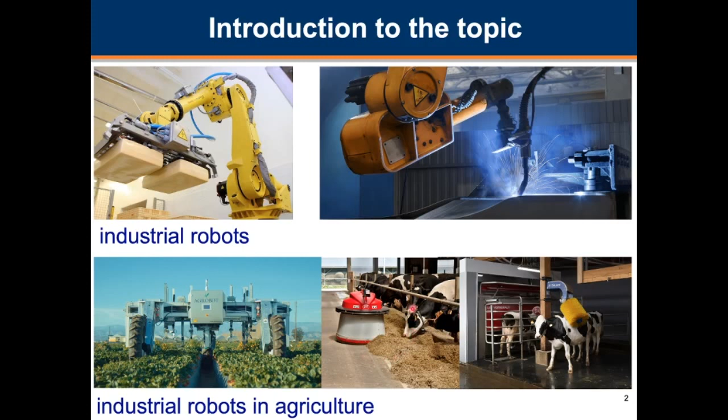The most technologically advanced solutions are milking robots, as they perform a number of operations such as locating the teats, pre-cleaning or washing in the milking cup, feeding, weaning an animal, one by one fitting teat cups over cow's teats, individual milking of each quarter of the udder, assessing qualitative indicators of milk, and successive disengaging of teat

cups. This robotic system contributes to complete replacement of human labor and improved product quality, as well as ensures preventive protection against teat disease resulting from dry milking. The most expensive and complex part of the milking robot is the system for manipulation, the working units, and a feedback system for spatial orientation required for manipulations.

But even if this part is the most complex and expensive, it doesn't provide the maximum completeness of milking, since the cups are connected to the teats in turn, which weakens the response to the irritation phase of the teat receptors to stimulate the maximum return of alveolar milk, which reduces complete emptying of the alveoli.

Delays during the attachment of teat cups also reduce the ability to fully utilize the neurohumoral phase of milk transfer, since oxytocin is secreted only once and enters the udder from 35 to 50 seconds after the first teat has been stimulated. By this time, existing milking robots are only finishing fitting the last teat cup over the teat still containing a portion of cistern milk.

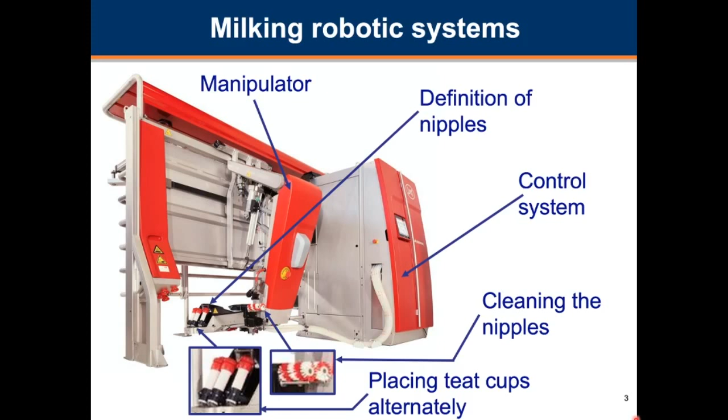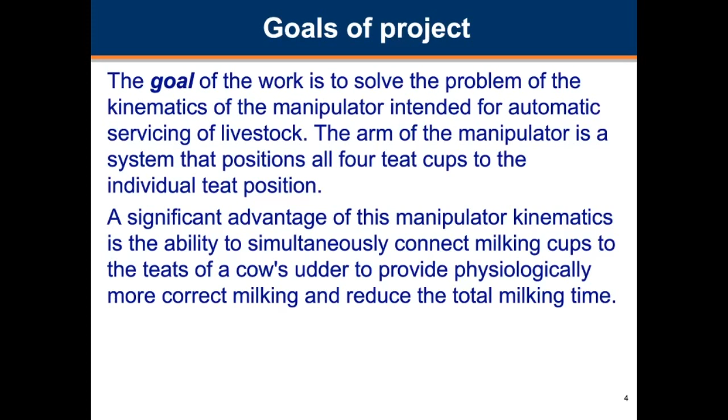So, the goal of the work is to solve the problem of the kinematics of the manipulator intended for automatic servicing of livestock. The arm of the manipulator is a system that positions all 4 teat cups to the individual teat position. A significant advantage of this manipulator kinematics is the ability to simultaneously connect milking cups to the teats of a cow's udder to provide physiologically more correct milking and reduce the total milking time.

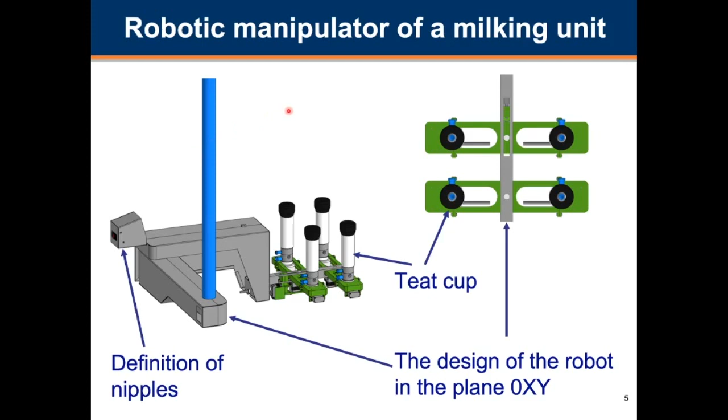To solve the problem of simultaneous fitting of teat cups over cow's teats, we have developed a robotic manipulator shown in this slide. The design presented above was developed based on the kinematics of the previously designed manipulator in our laboratory, supplemented with a module that provides the ability to control milking cups in a horizontal plane, shown in this slide on the right.

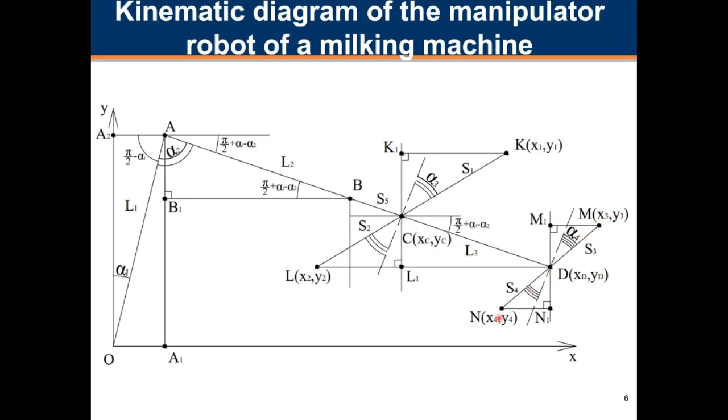The core difficulty of finding a solution to kinematic problems lies in the manipulator links, which are located in the 0xy plane, the kinematic diagram of which is shown in this slide. The direct kinematic problem involves finding the position coordinates of the working units. In the kinematic diagram, the working units are indicated by points K, L, M, and N. To find a solution to the direct kinematic problem, a system of equations was drawn up, presented on this slide.

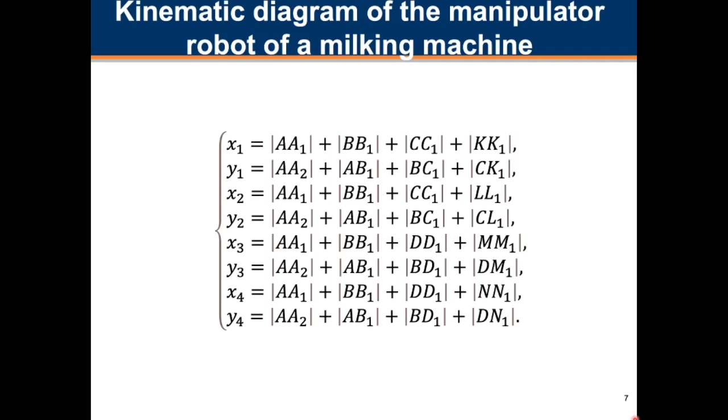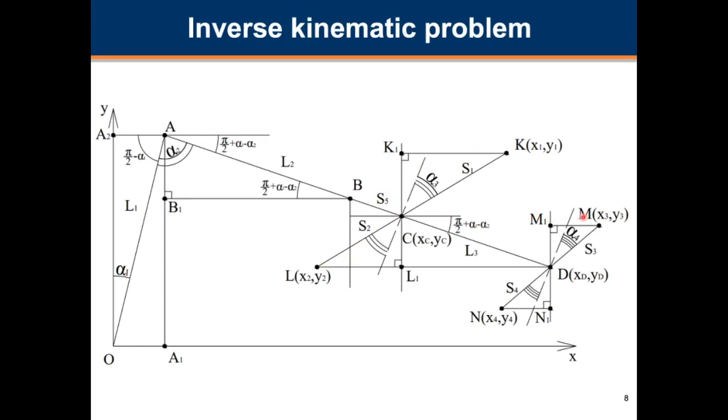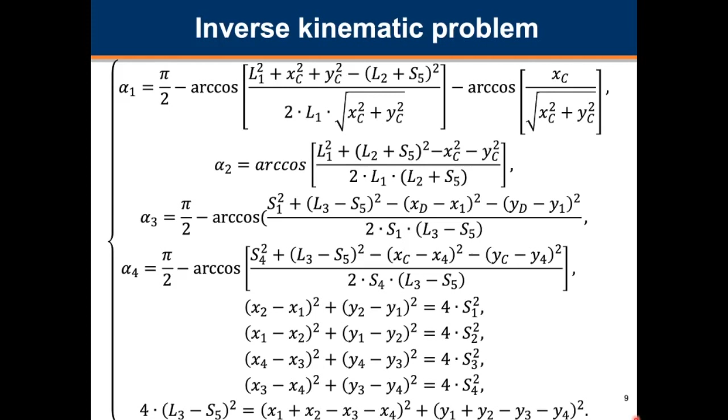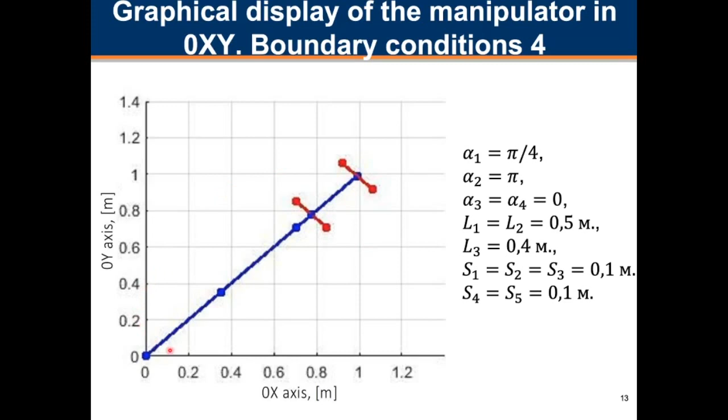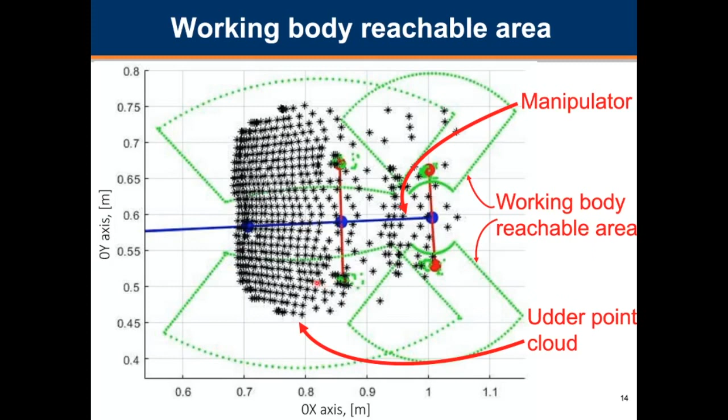So, at the end of my report, I'd like to note the following. The study has offered solutions to the direct and inverse kinematic problems. When solving the inverse kinematic problem by the Newton method to achieve a precision of 0.001 meter, the number of approximations didn't exceed 10. The obtained reachability zone of the manipulator is symmetrical with respect to the second link.

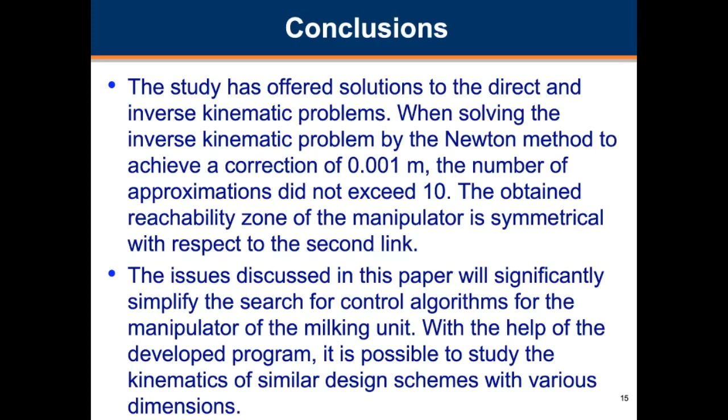The issues discussed in this paper will significantly simplify the search for control algorithms of the manipulator of the milking unit. With the help of the developed program, it's possible to study the kinematics of similar design schemes with various dimensions.